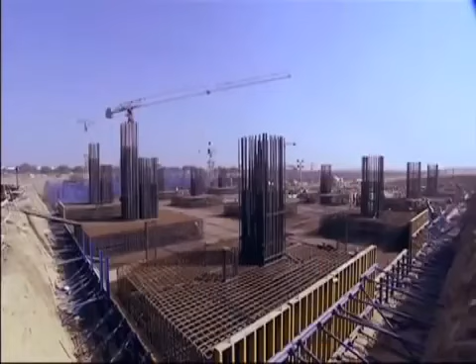We started learning about airports, and we visited most of the global airports. We interacted with a number of professionals to understand what the airport business is, and how it drives economic growth for the country.

A mammoth task completed against the backdrop of a looming deadline for the Commonwealth Games 2010. Thousands of workers constructed India's largest post-independence building with unrelenting speed.

Technology was very much part of that system. I cannot change my specifications, I can't change the pipes. What are your deliverables at that stage?

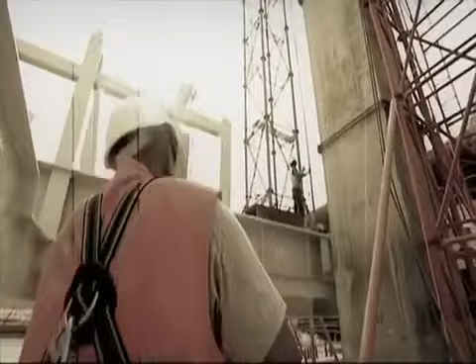This mega project brought in some of the brightest minds from across the world to design and build a state-of-the-art structure. Follow this team as they faced mind-numbing engineering challenges of installing a 45-acre roof and battled an unusual force. Everybody said, no way, I can't put my name into this project because it is a seemingly impossible task before us.

Watch this barren stretch of land on the outskirts of South Delhi, where a spectacular terminal megastructure comes to life in a record 37 months.

One of Asia's largest airport terminals, located in New Delhi. Terminal 3 is a symbol of India's emerging economic status.

With a capacity of 34 million passengers per year, it propels the Indira Gandhi International Airport into one of Southeast Asia's most important aviation hubs. This complex mega project challenged the creators, the GMR Group, at every stage of construction.

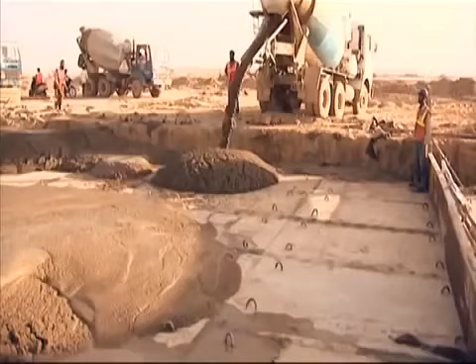On the southern outskirts of Delhi lay 300 acres of flat land, three times the size of the Vatican City, the smallest country. In 37 months, this is where the new terminal rose.

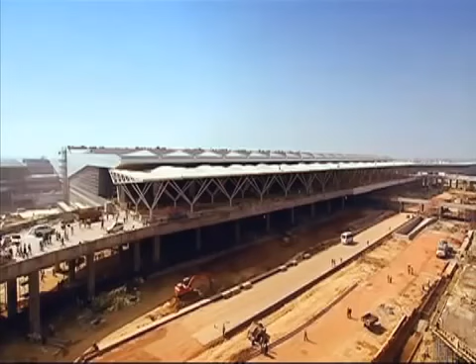On completion, it is said to be one of the largest and fastest built airports, an aerotropolis that represents modern Indian aspirations and infrastructure.

In February 2004, bids were opened by the government for the new terminal. The men behind the scenes had to be prepared for fierce competition.

We prepared almost for 1 year before, and we put the best people together for the bidding. I should say it is a God-given opportunity to fly the flag of GMR in the capital city of Delhi. That is the commitment which made us win this bid.

January 31st, 2006, the GMR Group won the bid. But for a company that started with agriculture-based industries and had slowly moved into the infrastructure space over the past decade, getting the basics right was tougher than it seemed.

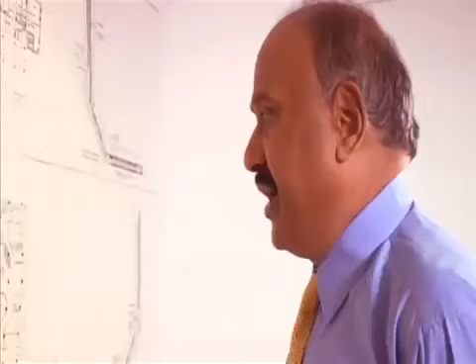GMR was new to the business of building airports, but raring to take off. Chairman G.M. Rao, the man behind the vision, set out the roadmap for the project.

We took almost 16 international consultants. And for us at that time, spending 34 crores for bidding was a huge amount of money for me.

An industrial engineering veteran, having worked on several power and steel projects in the past, I.P. Rao was the angry young man of the airport - silent, strong and religious.

Rao's mantra was that belief in something can make it happen. The terminal was his baby.

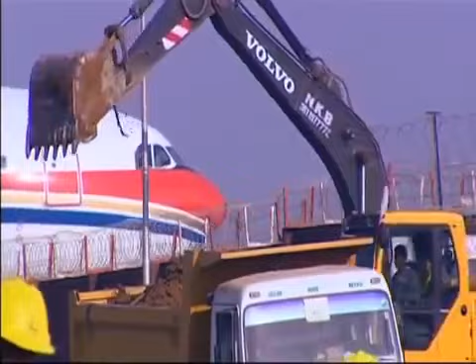Typically, construction of new terminals across the world takes over 60 months. Changi Airport's T3 in Singapore took 76 months, Beijing's T3 took 60 months, and so did Heathrow's Terminal 5 - from concept to commission.

At the very start of the project, I.P. Rao was faced with a challenge that tested his leadership.

The GMR Group had bagged the country's most prestigious project, but then came a twist. They requested us to shift the terminal from one side to another side. We had taken over the terminal which was built in the 1940s, and immediately after takeover, people were expecting that miracles would be done. There were certain parameters which they fixed that we had to change. It was a terminal built for only about 12 million passengers, but it was already handling 16.2 million passengers by that time.

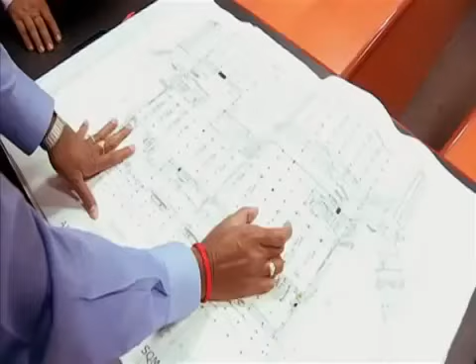It was April 2006. The master plan that GMR had presented was based on the government brief, but that had to be changed. It now had to come up at a location 180 degrees from where it was originally planned. Get more people, designers on the table, get all of you, and then sit down - I need a whole design just to change.

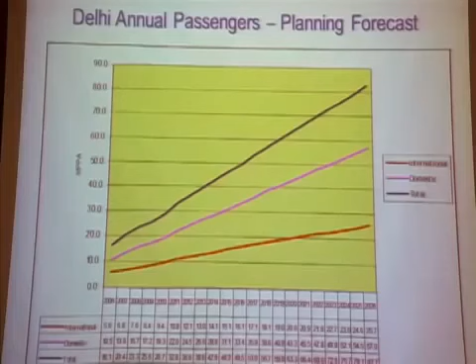This had many implications. Also, at the time of the bid, the government had proposed the terminal for 22 million passengers. But GMR conducted a study along with the travel trade industry and learnt that the terminal needed to have a capacity of up to 34 million passengers - that was 12 million more. Certainly not a small change.

The GMR team worked furiously on revising the master plan. But one thing, shift-wise, had to be taken care of - the whole passenger requirement had tremendously changed. More than 1.5 times had jumped, and then we had to redo the entire building and reroute the entire area. That really gave us a big challenge.

The GMR Group studied various international airports like Dubai International Airport, Beijing Capital Airport, Seoul Incheon International Airport, London's Heathrow and Madrid's Barajas Airport to incorporate the best for Delhi's new terminal.

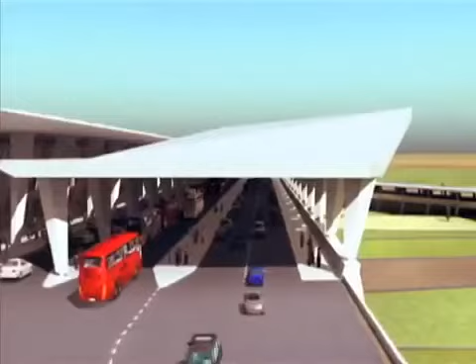Finally, in December 2006, the new plan was approved. The new passenger terminal building rises 9 levels, covers an area of 5.4 million square feet - approximately 94 football fields. The design is futuristic, with a strong emphasis on keeping it eco-friendly. Passenger flow is natural and instinctive, either moving towards the aircraft or away from it.

Below them, almost 7 kilometers of baggage conveyor belts hurtle through, making for 5 levels of high-end automated security screening. At 4.43 kilometers, the airport's runway is the longest runway in Asia.

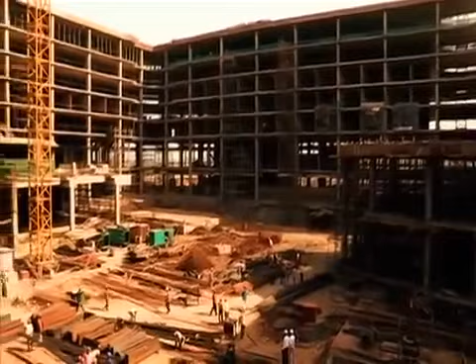Once the design parameters were fixed, the construction got underway, but it was not as simple as it seemed. I should really give credit to the government that for the first time a private airport operator, a private company, was called into a National Facilitation Committee, which was headed by the Cabinet Secretary and monitored by the Prime Minister himself. They were people who understood our challenges, and they've been pretty helpful for us in getting clearances.

At Delhi Airport, because the time was very short, we had to do planning, designing, identifying a contractor, and at the same time implementing the project - it was all going on in parallel.

Larsen & Toubro, one of India's largest construction and engineering conglomerates, took on the runway, taxiway, aprons and the terminal building. When we got into it, we had to mobilize nearly 1,000 engineers from more than 40-50 nationalities, and to mobilize 30,000 workmen, to mobilize concrete production of nearly 1,000 cubic meters per day.

At first, the land was flattened out and then the earth excavated, enough to fill a 210-kilometer long freight train. This project needed tons of steel, concrete and other building materials.

Bringing it into Delhi from across state borders posed a challenge. Heavy transport trucks can come into Delhi only between 11 p.m. and 7 a.m. We used to plan with the Delhi police, sat with them. These are the trucks that have been verified, we gave them separate codes, and they were lined up sincerely before the Delhi outskirts.

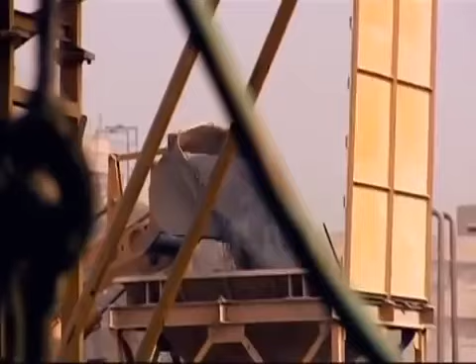To avoid disruption, it was decided to keep stocks of up to a month's requirement. The most modern and eco-friendly hot mix plant was imported from Italy and set up at site.

Vendors were encouraged to move their fabrication units to the project site to cut down on logistic delays. We wanted to make sure, as much as possible, to have control ourselves. So we would bring the raw materials in and then shape them.

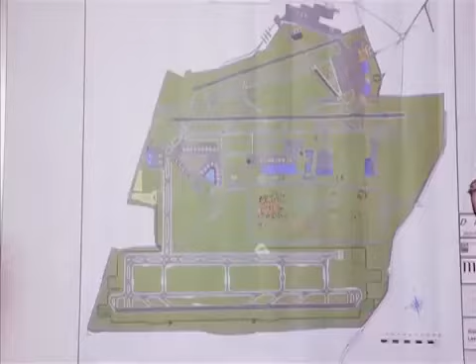Before excavation started, the site of the runway was being evaluated. Active and animated despite his 70 years, R.C. Rekhi was the mastermind behind the plan and design of the new runway. The runway was envisioned such that the entire system could handle over 70 aircraft movements at peak hours.

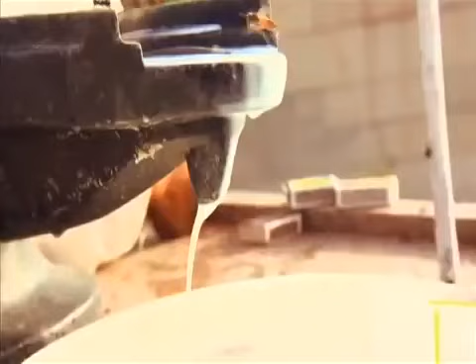But when the master plan changed, so did the direction of the runway. This posed a rather unique problem. The design and construction of Delhi's new runway was battling an unusual force.

Simulation showed that there was a nearly 80 feet high Hindu god Shiva statue in the flight path. Typically, incoming aircraft must clear 1.4 kilometers of runway before they can touch down, but this was not possible due to the statue and its height.

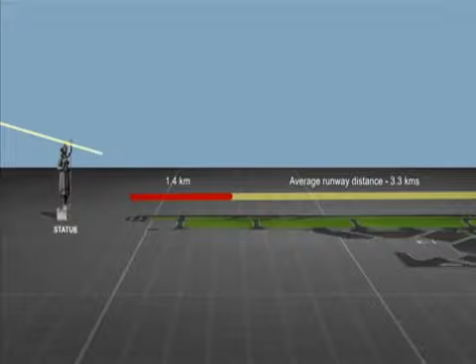This meant all flights must land almost 1.4 kilometers after the runway actually starts, forcing the pilots to use full brakes and reverse thrust to slow down before the runway ran out. This was extremely dangerous and could lead to accidents.

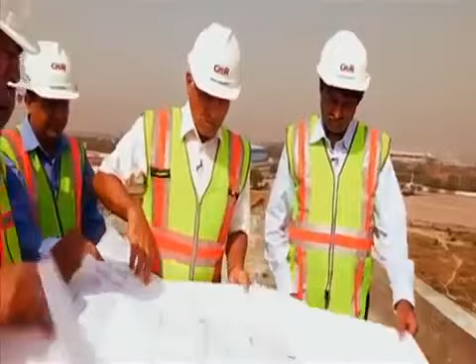Lowering the statue or relocating it would no doubt raise religious sentiments and could take months. Simulations were done, detailed calculations and flight paths studied. Here were the best engineering minds looking for a solution. So I asked the engineers to understand and tell me what the way out was.

"Sir, we have to shift by 10 degrees. If we shift by 10 degrees, the whole plan gets disturbed." So I told them, tell me, to what degree the Shiva statue has to come out. We found 3 degrees. I fixed the runway and said go ahead. They were shocked: "Sir, nowhere does this happen like this."

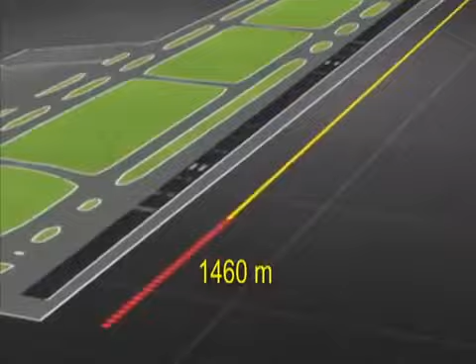At last, a solution emerged. The new runway was planned at a slant of 3 degrees from the original and was eventually extended by 1,460 meters to be compliant with air safety standards. At 4.43 kilometers, runway 11/29 is one of Asia's longest runways, allowing planes to approach and land safely.

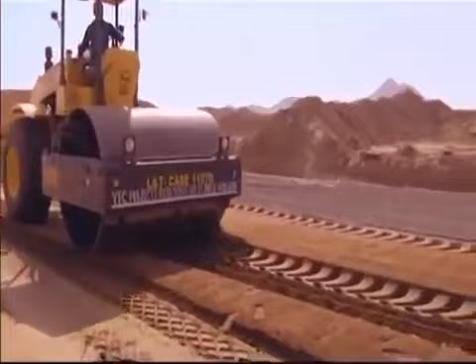Construction finally began. But there was another problem: the site of the new runway had been a swamp for several decades. This had grave consequences for the new runway.

This meant that soil on the runway site had very low load-bearing capacity, not enough to take aircraft load and landing impact. Ultimately, the load imposed by the aircraft has to be transmitted to the soil only. If the soil has a bearing capacity which is far lower, it only means that your pavement thickness must increase correspondingly so that this load is transferred over a larger area of the soil.

The solution was to strengthen the soil by mixing it with cement and using glass grid fabric between the layers to increase the bond between them. For the first time in the country, we did this base layer with a cement-treated base. The aim was to design it for next-generation aircraft like the A380s, with a takeoff weight of 550 tons.

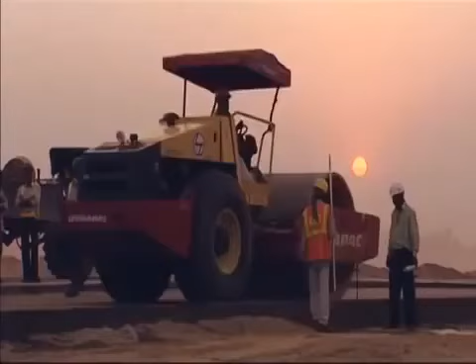For the terminal structure, the real challenge was to keep the design simple and construction well planned. A lot was at stake. How would all this come together without chaos and wasteful mistakes?

Meanwhile, the existing domestic airport needed urgent attention. The existing facilities were creaking under the huge increase in traffic, both passenger and aircraft movements. The domestic terminals were designed for 12 million but were already handling 16 million passengers. Improvement works had to be carried out in a saturated terminal, so it was a stupendous task, I would say. No other airport in the world has actually gone through this kind of rigor.

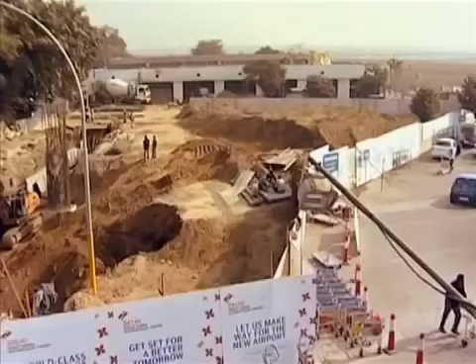GMR went on a war footing to solve this problem. We felt there was an important need to start a new terminal to decongest, and also parallelly make preparations ready for T3. Terminal 1D was built to ease the pressure in the interim.

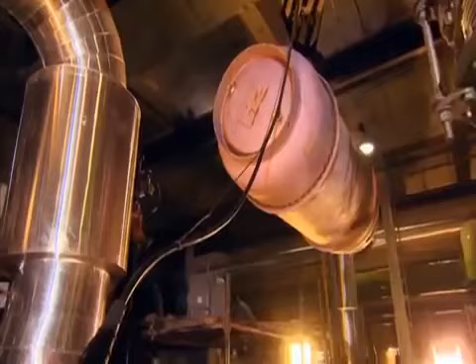Over 30,000 workers were on site in peak summer, through dust storms, the monsoons and foggy winters. Often they worked in precarious conditions, manning heavy machinery. At times, power would be intermittent, leaving electrical cranes hanging dangerously, and men would be caught in lifts and in darkness.

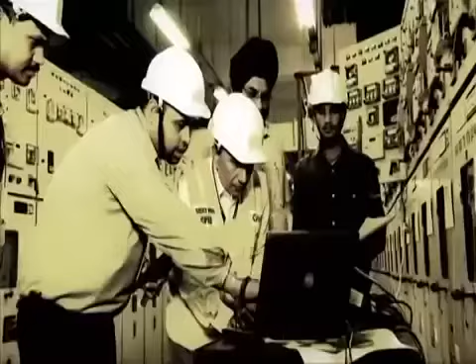Uninterrupted power was a key word for Sujit Nag. Highly disciplined and process-driven, Nag had to be on top of it all the time. There was no room for mistakes.

An electrical engineer by qualification, Sujit had worked in the US, UK and Asia, setting up power plants. Mammoth projects with pressured deadlines. But he had never worked on a megastructure like this one.

His main responsibility was to power the construction works and later the Terminal T3, which would have millions of passengers walk through it from all parts of the globe. The very basic thing was having the power supply from the distribution company.

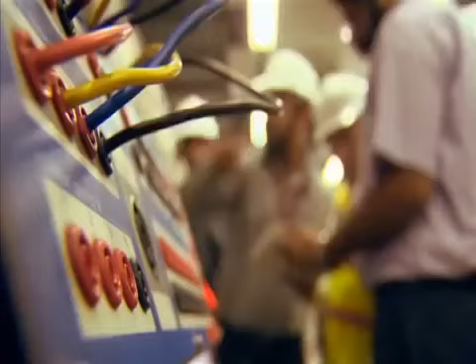That was not ready, so obviously we have to carry out a temporary arrangement. Biggest challenge is that I commission the system, and at the same time, I give the power supply to the operational team.

Anil Dhawan, head and construction manager of T3, was a man on the move. He is athletic and passionate about fitness, whether he is on site or in office. In a military-like manner, Anil led the team that constructed the terminal.

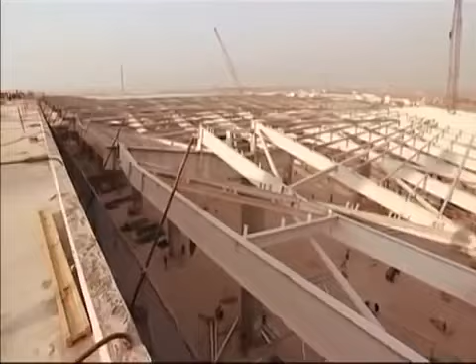Anil's big challenge was to assemble the roof. The expanse of the roof and the pier spread over 45 acres, and an 18,000-ton steel structure was to be installed on top of it.

The GMR team went over every engineering detail with a fine-tooth comb. Was the design sound? What kind of equipment was needed to achieve this task? What are the specifications that you would actually need?

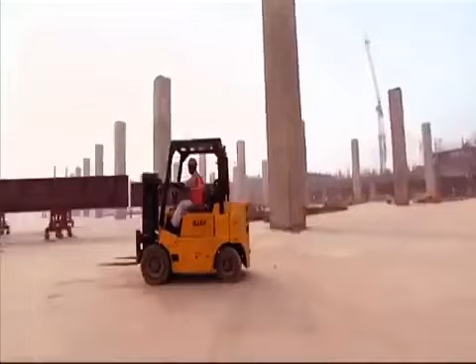Anil needed to find answers soon. Any delay in completing the roof would have cataclysmic effects on the costs.

They had to cover an area of 45 acres with structural steel that was fabricated and brought in from Singapore. The critical element was the girders, which came in dimensions of 5 to 10 meters each.

For engineering purposes, the roof was divided into the land side and air side, and further divided into 6 smaller units for efficient handling and placement. Each of the 6 units weighed heavier than an A380 aircraft.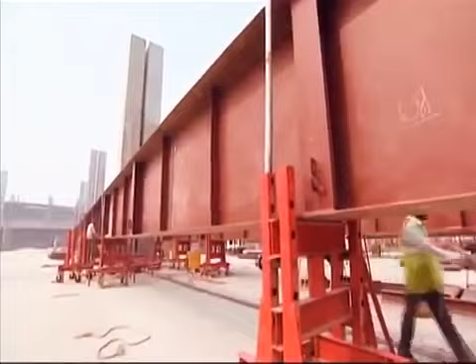We allowed ourselves about 6 months to actually complete the roof from start to finish. There was no room for error.

Erecting the roof was a key milestone in terms of the project timeline, as it was only after this that all the other civil and technical works followed. The weather was a key factor here.

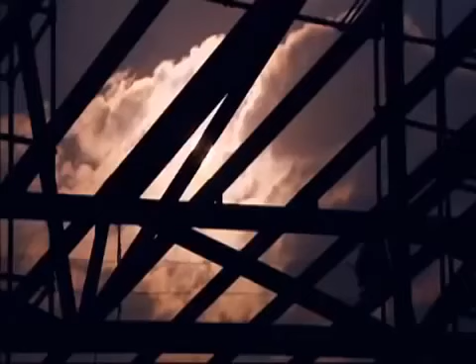Our original plan was to have the roofing installed by April of 2009. The monsoons were only 5 months away, and GMR had to finish the roof structure before the rains lashed through Delhi.

Anil's team had been preparing intensely to begin fitting the roof structure, and they were now ready to start. Each of the units were first assembled at the 10-meter departure level.

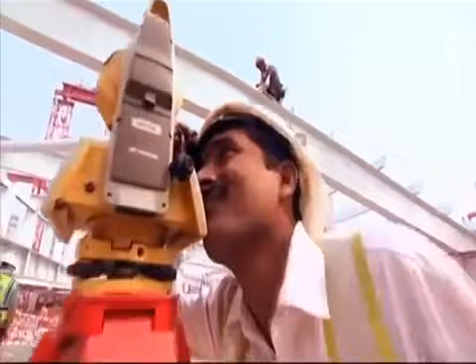Then raised 18 meters using computer-operated hydraulic jacks. Every millimeter lift had to be done in unison, its alignment checked multiple times. A minute glitch could have disastrous consequences on the project timeline.

Engineers were on edge as this sort of lift required utmost precision. Each lift took about 6 to 8 hours.

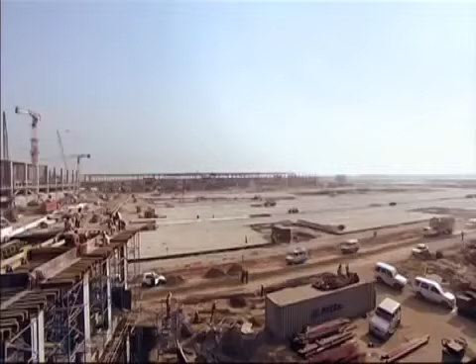But designing of the lifting system took us 2 months, and getting the jacks required for us took another 2 months. So really, physically to start at site, we did 4 months of back work on the table.

22 months left to go. The terminal building was rising fast.

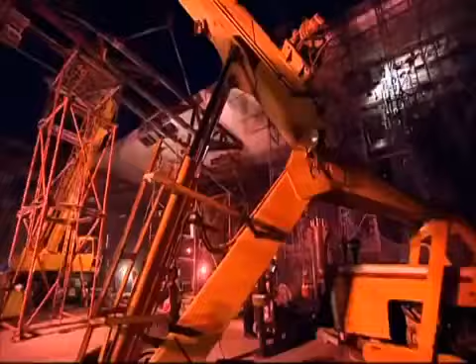The man who will turn this into one of India's most intelligent buildings had a challenging time ahead - ensuring that the airlines cannot fail to connect to the back office.

Davesh Shukla was young, hungry and powered by a strong creative streak to create something one of its kind. If his IT systems failed, the entire airport would collapse.

Bring in efficiencies, better operation procedures, and make people's life more easier. And at the end of the day, that's what integration is about. By the time we finished, it was more than 75 systems that we started integrating together.

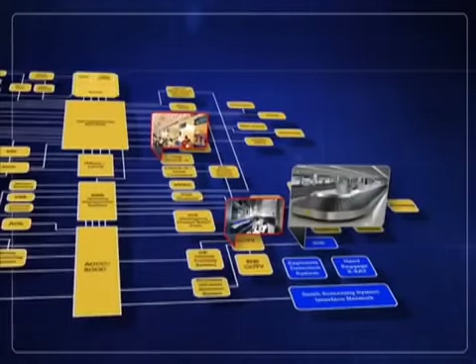If Davesh has his way, then his IT systems will connect every system in the airport, from check-in counters, baggage handling, airport screens, lighting, passenger movement systems like boarding bridges, emergency systems like the fire department, and key services like immigration.

It is practically the lifeblood of the airport. The aim being to make for a faster turnaround of planes taking off and landing, and most importantly, giving the passenger a smooth experience. Meanwhile on the runway, Rekhi and his team were on the last leg to finishing the construction. They now had the challenge of delivering a high-tech runway.

There was a dense fog that settled over Delhi during winter that resulted in very poor visibility. Flights were either cancelled or delayed as they were unable to land or take off in these conditions.

To make matters worse, the runway site was close to a green belt, so the intensity of the fog was even higher around here. To counter the thick fog, it was decided that the runway was to be made Cat 3B compliant, which meant it would allow flights to land and take off even when visibility is as low as 50 meters.

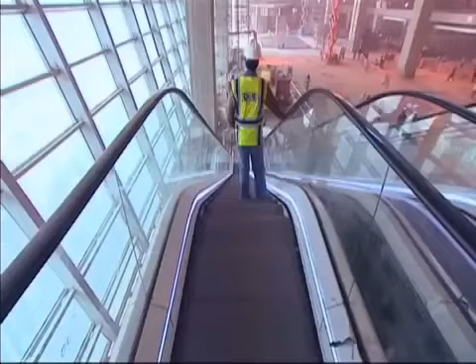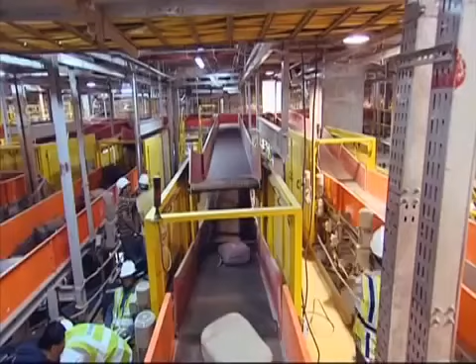An Indian origin Singaporean citizen, Roy, is a people's person, but he had no easy task. He is responsible for everything that enables movement in the terminal: travelators, passenger bays, and baggage belts. He had to set up the complicated maze of belts that would safely transport and handle 12,800 bags per hour.

The expected footfall by 2020 was projected to be over 60 million. We actually went into Changi Airport, KLIA, Hong Kong CLK, including Munich and Heathrow, London. There we actually tried to understand what exactly the best practices they follow. The baggage handling system design was a complex one.

Terminal 3 has a state-of-the-art complex that features the common use terminal equipment baggage handling system with explosive detection technology for greater efficiency and security.

Hello, hi ma'am, how are you?

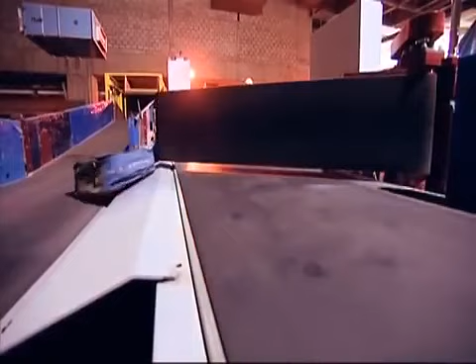Once the passenger checks in their bags, the bags go through a number of checks. At first, if a bag going through the X-ray check is found to be suspicious, it is automatically separated and diverted through another channel. If that is clear, the bag will go to the respective destination.

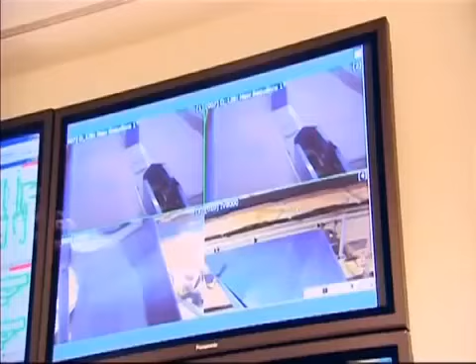And if it's not clear, we have a team of security experts who will visualize these images and interpret their content. And if it is accepted, it will go to the respective destination.

And if it is rejected, it will go to the next level of screening, which is our CT screening, where it will slice the bag into 65 different pieces, inspect, and take a decision. If it is rejected again, it will go to a team of experts reviewing those images. From there, accepted bags go to the destination, rejected bags go into level 4 screening area.

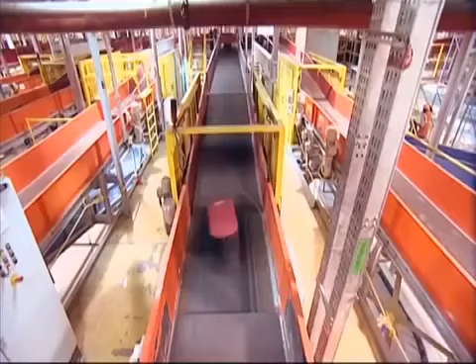Work on the baggage handling system began and the key contract was awarded to Siemens.

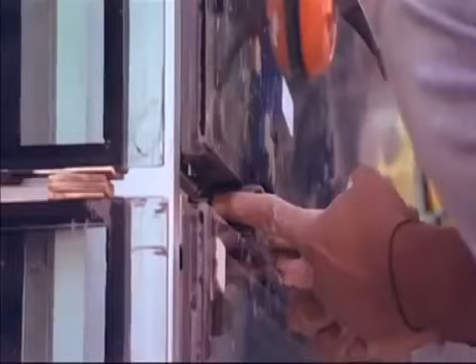In other parts of the terminal, glass was being fitted. Flooring was simultaneously being laid and was closely supervised.

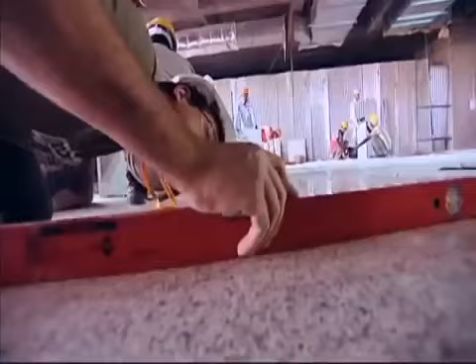Check the level after each step. Laser-guided measurement tools were used to ensure that over 100,000 square meters of granite tiles imported from Bahrain were properly aligned. Yes, like this. This is perfect.

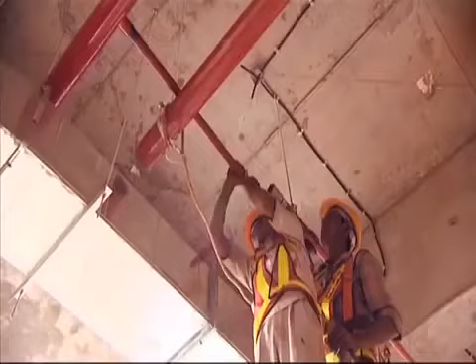With multiple vendors at work, clashes broke out. It threatened to upset the schedule, result in cost overruns, and engineering nightmares.

So in September 2008, GMR brought in BIM, the 3D Building Information Modeling software. You fed in all information and technical specifications of each aspect, power, baggage handling, IT and security, and it simulated conflict areas, programmed the flow of work and resources required.

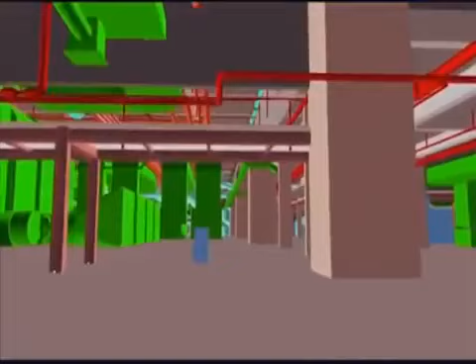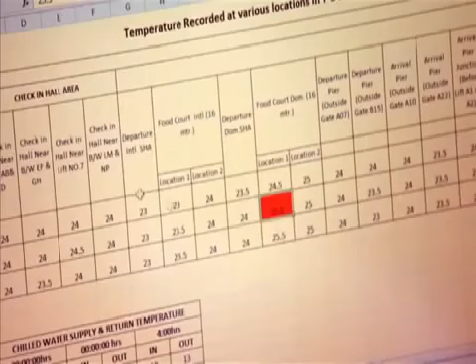This stage of construction was the most pressured. I think this was probably the only project, the first project, to have employed that, and to have developed a 3D model where all the obstructions were looked at and cleared prior to installation. We saved cost, we saved time, and we were able to produce a quality product.

Sujit Nag had an added brief to ensure that the airport was environment friendly and LEED certified. Temperatures in Delhi range from 5 degrees in winter to an extreme almost 45 degrees in summer. All the glass meant higher power usage to keep the area cool and comfortable for passengers.

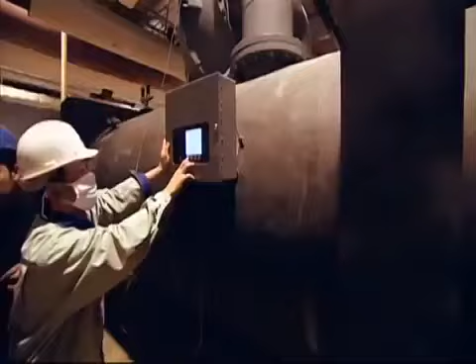It was a tricky balance of maintaining good lighting conditions and keeping the heat out. The roof was designed with slits to take advantage of and use natural light. A central monitoring system, CMS, is used to control automatic sensors that detect day and night times and sets temperature and light accordingly to use the least energy.

We are the first airport to achieve this. No other airport in the world has got a green building certification in the gold category.

It's action stations at all ends and the deadline is crashingly close. Will everything come together in time?

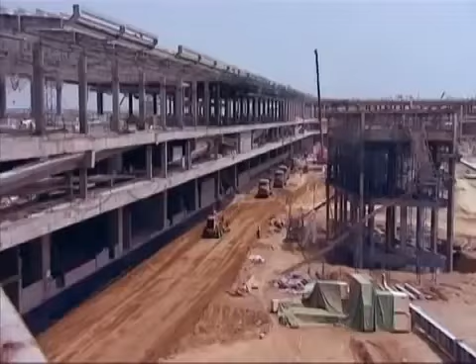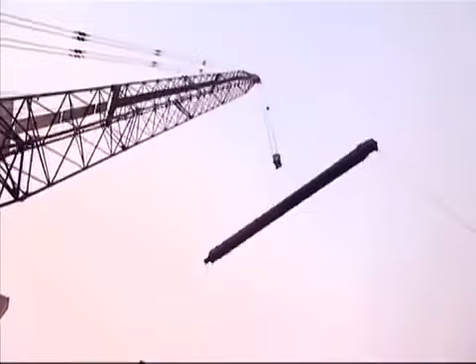Meanwhile, Anil was racing against time to finish the roof before the monsoons arrived. On the air side, GMR adopted the pull method to install the roof. Cranes carried the massive structural steel girders to the top of the tower, where each section was assembled and pulled to an intermediary level. Finally, with 4 massive horizontal pulls, the roof layout was completed. Week after week, 18,000 metric tons of structural steel was fabricated, assembled and raised.

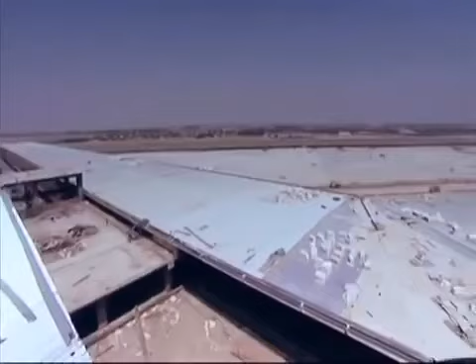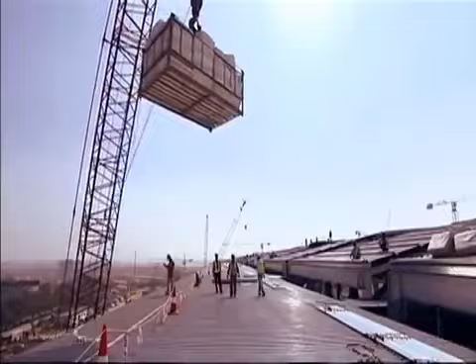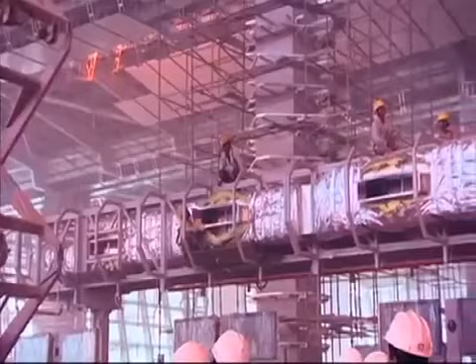Engineers and vendors already at work on site redoubled their efforts, now adding all the elements that turned what is said to be India's largest post-independence public building into its most prestigious airport. Suspended from the roof were a number of essential services like the air conditioning, fire prevention sprinklers and lighting fixtures. All these had to be in place before the false ceiling hid them away from the view of the visitors.

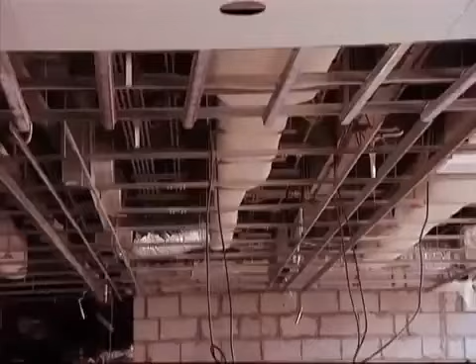For the ceiling, L&T was called in. The false ceiling contractor got into the job and then realized that there's such a massive area that all the false ceiling people in India put together could not manage this. So we had to train our own people, get them inside.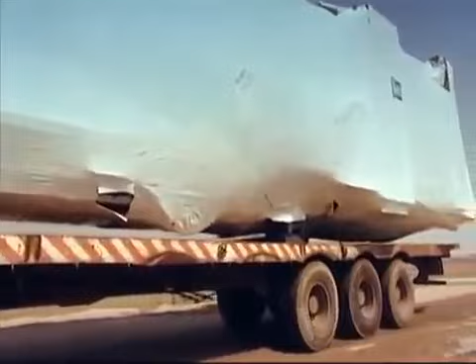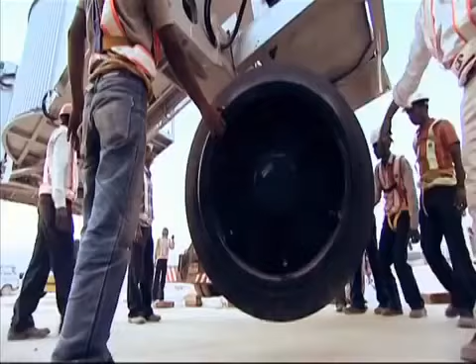On the air side, a complex set of processes were at play. Roy oversaw the installation of the passenger boarding bays. These were manufactured in China and Japan and transported to the project site in Delhi. They are delicate units that fit into the aircraft door at one end and at the terminal on the other. Any damage to the units would render them useless or dangerous to install.

July 2009, Roy and his team were tracking progress. Then one night, he received a call. 2 of the trucks transporting the delicate passenger bays had overturned in an accident. The bays were badly damaged. With just 8 months to go, it was impossible to manufacture new units.

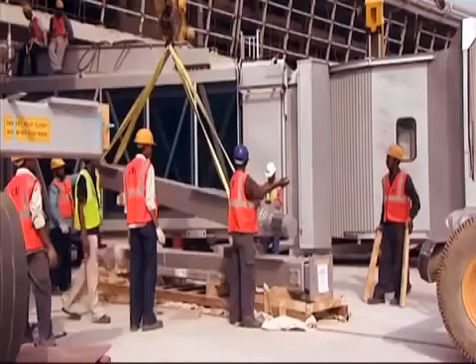Roy had to come up with some other solution. They tried to actually recover these 2 units, but it was not possible because of misalignment. So together with the factory team members, they diverted 2 bridges which were actually meant for other airports, converted them to their dimensions, and transported them back on a timely basis.

Roy and his team started installing the bays. It took 6 hours to install each one, and there were 78 bays to be installed.

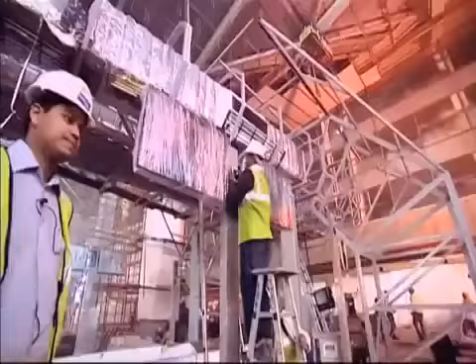It was high alert on all fronts. All departments were working furiously 24/7 to complete construction, fittings and interiors. In about 180 days, starting January 2010, all systems were to be put to test in a 24-week drill, the Operational Readiness and Airport Transfer, or ORAT.

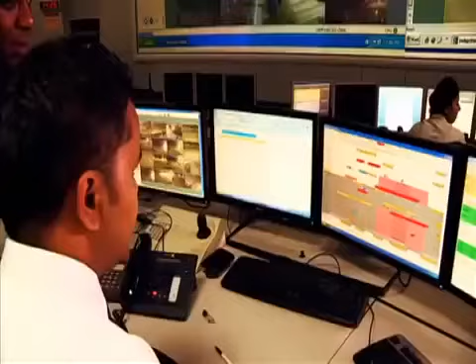Andrew Harrison was a man living on the edge. He is the Chief Operating Officer for Delhi International Airport. He led the operational readiness and transition to the new integrated Terminal 3. Before joining GMR, Harrison had worked with BAA, Gatwick and JFK airports. But in India, its people and its work culture were all new to him.

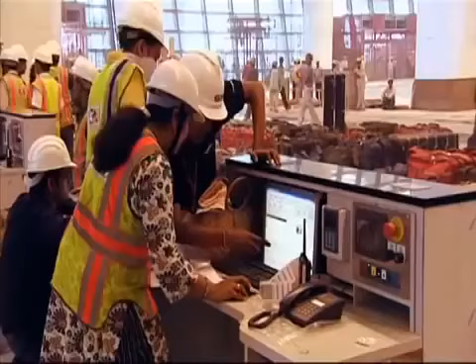We engaged Munich Airport, who have successfully done ORAT in a number of airports, including Bangkok, including Hyderabad. And we engaged them because they have a lot of experience. But very importantly, we had a team built around them so that that experience and that knowledge could be transferred to our team.

Were construction and systems ready on time? Did they pass the tests Harrison put them through? You are professionals, act as professionals.

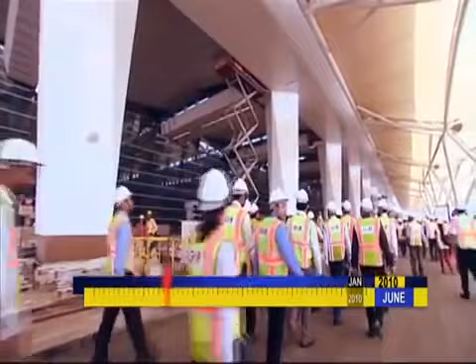Finally, the ORAT, a test run of live airport scenarios, begins. For 6 months, 56 trial drills using 50,000 mock passengers were conducted to test all systems and processes, each one a little tougher than the one before.

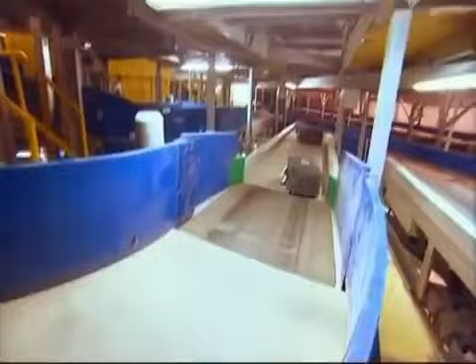Here is one scenario. The baggage handling system had to be tested with over 27,000 dummy bags and identification tags created for 36 flights. All check-in bags had to be tagged with a code to enable automated identification so the bags could be sorted and loaded into the respective airlines without glitches. Any error could hinder the check-in and boarding process and result in flight delays.

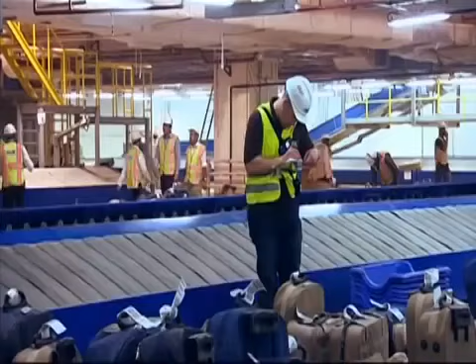GMR had to make sure airport staff were fully prepared to operate the complex 5-level automated baggage system, and this needed meticulous planning. It was painstaking and exhausting, but had to be done. There were also a number of systems like check-in counters and flight schedules that had to work together seamlessly.

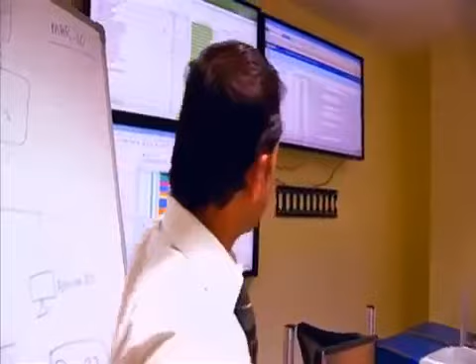Our difficulty is the airline back office connectivity, that the airlines cannot connect to the back office. But all was not well with the terminal's IT system. In February 2010, as ORAT started, merely a month was left for completion and a couple of months before opening day. It was realized that the IT network designed for the airline back office system did not meet the requirement of the airlines. That would mean we cannot open the airport up, or if we open the airport up, the airlines cannot do the back office functionality. That would cause huge grief to the airlines and ground handlers. At that point, we thought that if we don't get this right, we're going to have an issue with the airport operation.

Managing people was equally tough. One big challenge for Andrew was changing the mindsets of the workers and training them to use the new technology.

Opening was now just a month away. The operations control room under Andrew was monitoring every square inch of the airport, with over 3,000 surveillance cameras rolling 24/7.

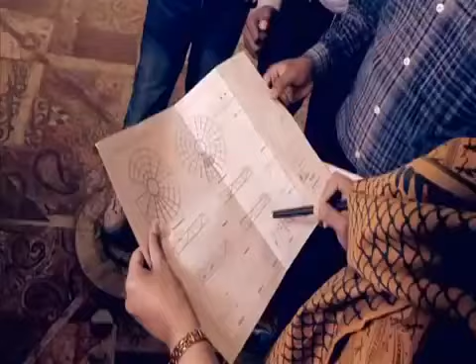The artwork and finishes team was also on overdrive, overseeing installation of elements that gave Terminal 3 its character. Project head IP Rao was on one of his many rounds of inspection. Before he gave the thumbs up for opening day, he had to ensure all bottlenecks were cleared and there were minimal teething problems.

Change was about to set in. Delhi was set to unveil Terminal 3, an extraordinary dream, after 37 months of hard work and challenges. But for the passenger, GMR needed to ensure it was smooth sailing right from check-in to baggage screening, clearing security and enjoying the retail and food and beverage experience, all in good time to board the flight and guarantee a hassle-free transit.

On 3rd of July 2010, the much-anticipated Terminal 3 was inaugurated by Prime Minister Manmohan Singh and Congress Chairperson Sonia Gandhi. This airport terminal establishes new global benchmarks. It also exemplifies our country's resolve to bridge fast enough the infrastructure deficit in our country.